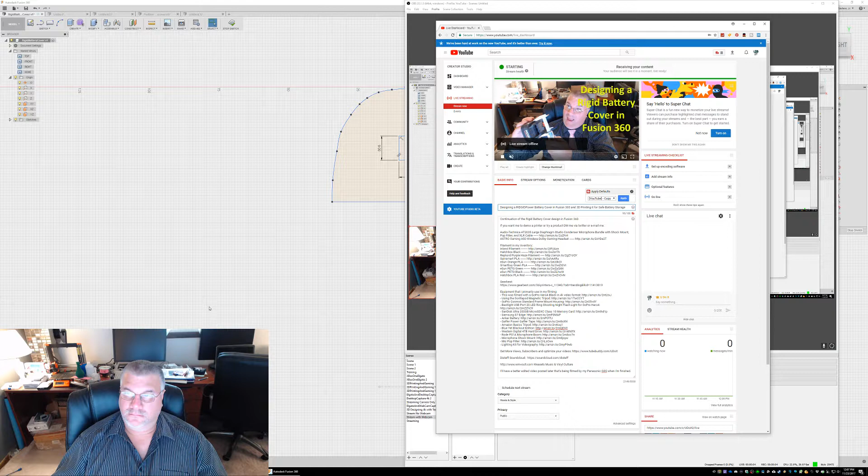This is designing a battery cover for the Ridgid battery that I have here. This is the Ridgid battery. We're continuing where we left off. This was the part that I designed and 3D printed that you can see on the screen right now. And I just want to continue the plate down the bottom. And if we have time before turkey is served, we'll do this.

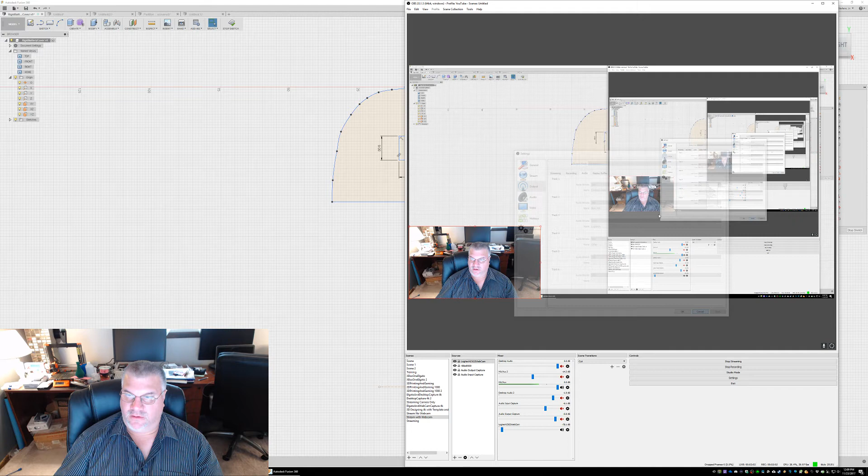So the last we left off, I was drawing a bunch of construction lines, and that ended up binding me, constraining me too much. So I'm going to do a 3-point rectangle to continue this bottom part that has to extend down to this point. And I already have that measurement, so I can do a dimension from here. Nope. Dimension here. Here. I just want to verify that measurement with my calipers. 68. Yeah, that's right.

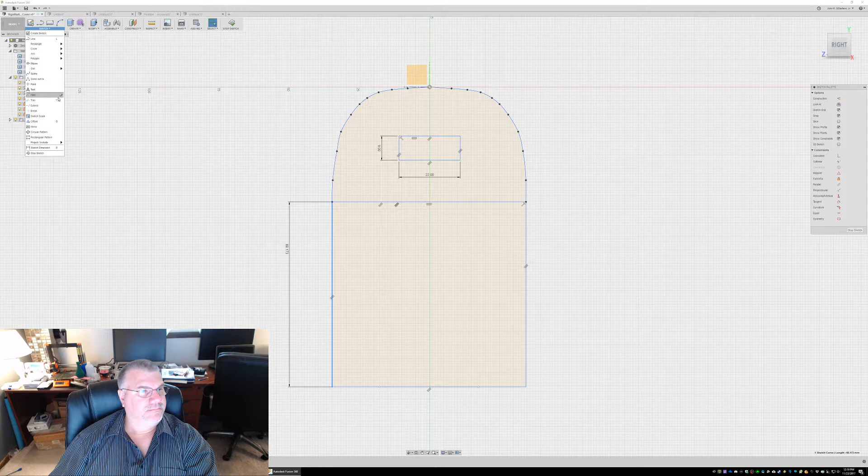So we'll do a 3-point rectangle, and 3 points because I want to span these 2 points and a point down here. And then I want to do a fillet down here. Do from here. 17 is fine.

Okay, so these two would be considered one unit right here. So that would be the entire plate that would go from this point all the way to the end here. Then I have to work on a portion that'll block this area here. So I need to take those measurements now. And I'll draw some construction lines. I have a measurement around 31 millimeters.

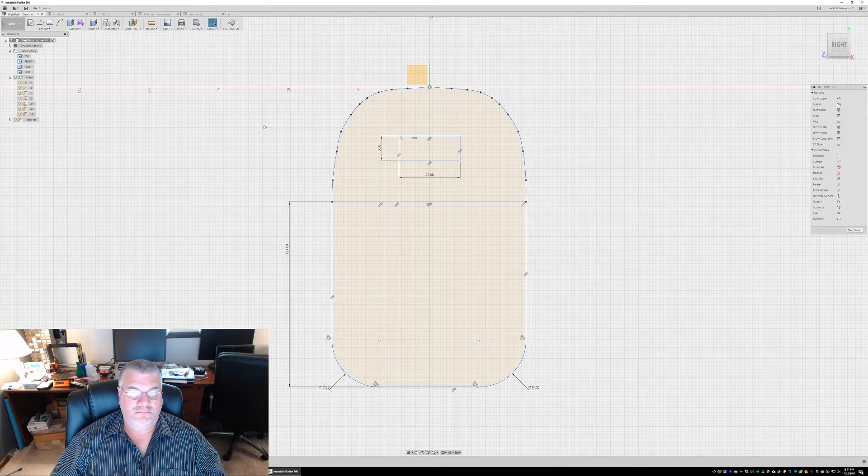So we can draw construction. And it's going to be from the center point. I want to measure the width. I don't need it to be exact. I'll make it a little bit smaller. So I got 43 millimeters for the inside. I want to do a center point. We'll just make this 43. So that's going to give us our extents, so we know where we're going to.

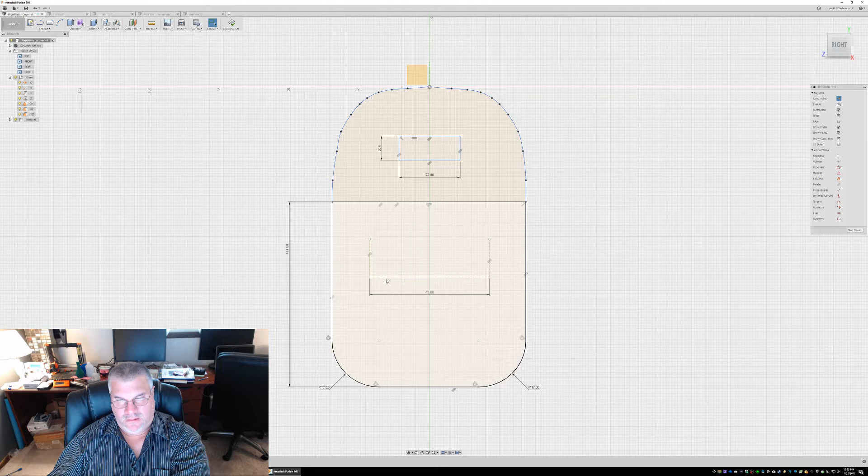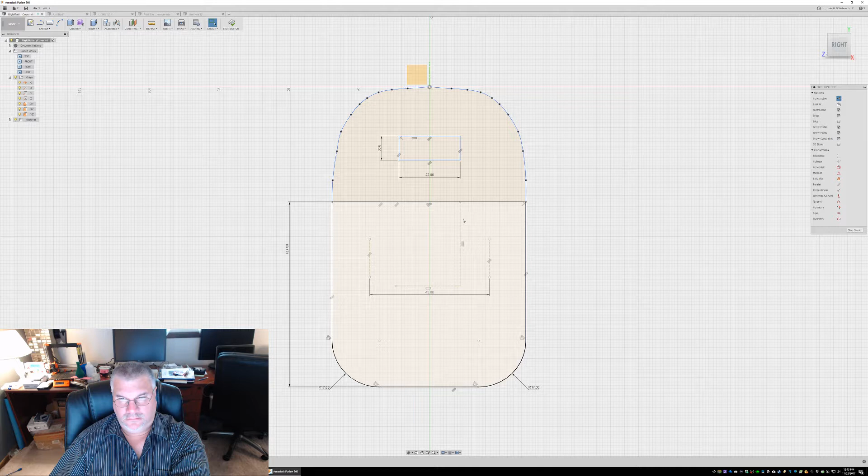That's how wide this opening needs to be. And I think we said 31. Yep. 31 measured downward. And now I'm just dragging these points up. Dragging the whole thing. Alright, so now I can do a 3-point rectangle. And this is not construction.

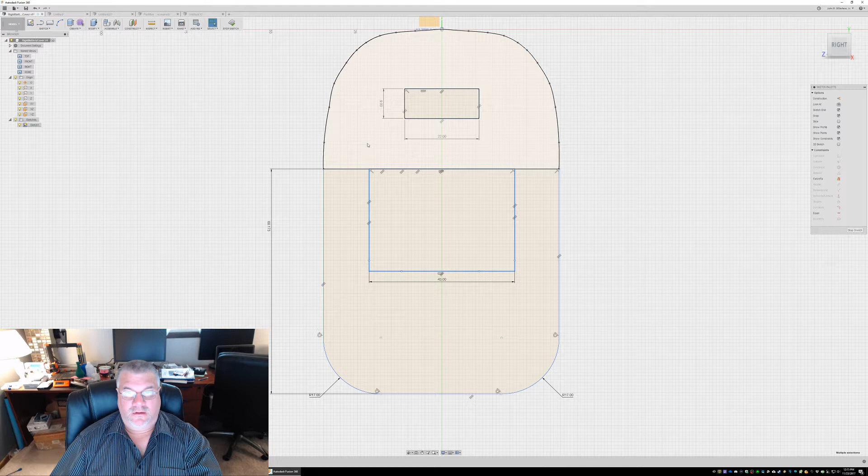Well, I'd like to see if I can hide this. I don't know if I can hide individual pieces and then unhide them. Alright, I'm not worried about it. I got my point. So this needs to be raised. No, that'll be extruded downward. And I don't want to go down all the way. Just trying to think how to do this so I'm not chewing up a lot of plastic. Guess it won't matter if I have the infill set low. So let me just measure this now. Okay, I got 11.86, so we'll just call it 11.

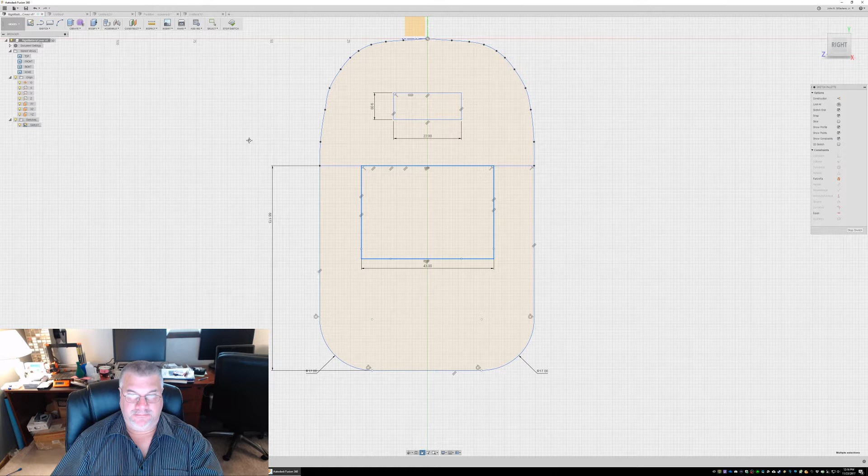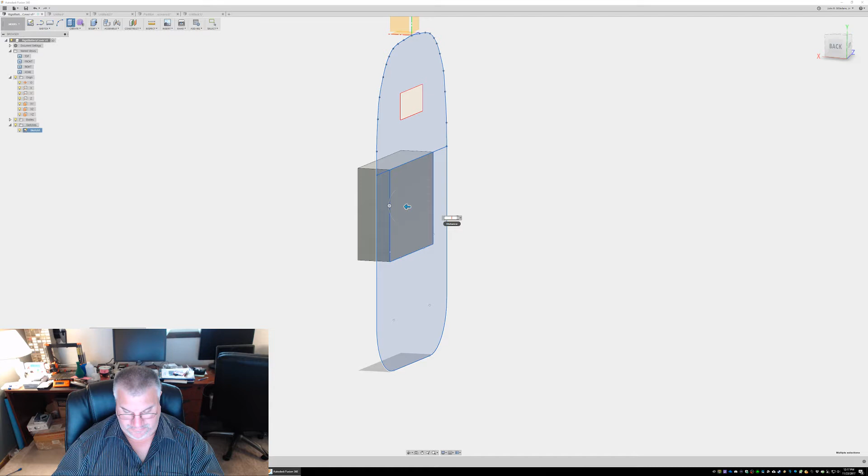That'll be extruded downward 11. Probably do that now. Extrude downward 11 millimeters. And then this entire thing needs to be extruded upward. And I think I measured this 2mm or 3. 2. And then this one edge.

So when I slap this into this here, push it down. That's the way it's going to be when I try to slide it on. Only the one really locks in. I can get it there eventually with some wiggling around. So what I need to do is I need to taper this end, thanks to, I think it was Bob. Happy Extruder said to taper this. Can we do a little chamfer maybe?

What's going on? That ain't right. So we want the edges, so we'll select this one and that one. Is that right? Nope.

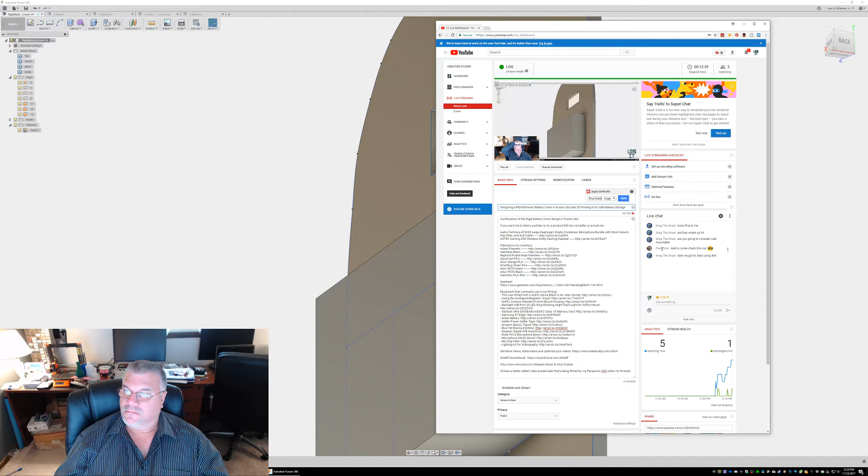So, are you going to consider wall mount? Oh, that's another idea. Wow. I didn't even consider that, Greg.

Let's see, can I pop this chat out? And then let's resize my window here. I'll resize it over to this half. Change my chat. Yes, that's way too big. That's what she said.

Yeah, so 360, yeah, if you're not using 360, it's definitely awesome. Definitely awesome.

So I need to figure out how to chamfer this, and that's...

Yeah, you can definitely use this technique to do it, although I don't necessarily recommend my technique because I'm still learning. But I got to tell you, from Bob's help and Happy Extruder's help, Bob Young, Papa Top on Twitter, they've been guiding me along the way and then sending me links to videos to watch.

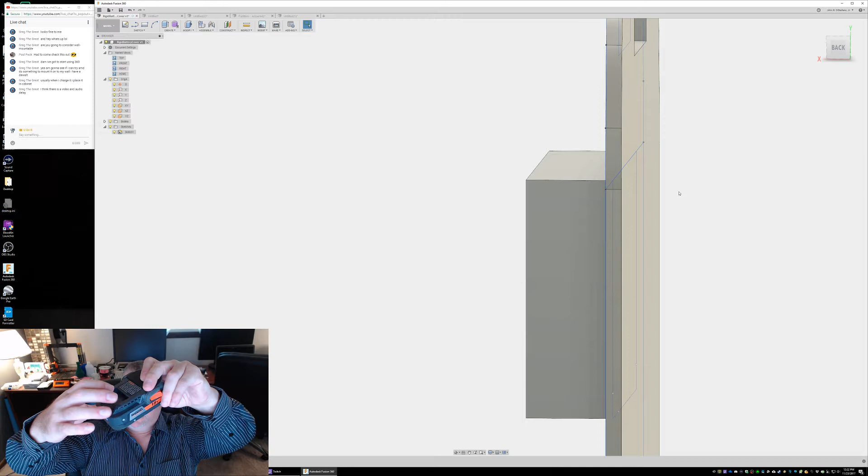All right, so this is only one part of what I need. This gives me the whole top part and the area that's going to protect the battery, which the terminals, I really don't need this part in here. I'm just doing it anyway just so I know, but I think it would give it some rigidity and would help my cause.

And that might even be a point for storing it on the wall, because then I have an area in this part here where I could drill into and mount a hook, or even design this out so I can have what are those notches called that you use for hanging pictures? Yeah, you know what, that might be.

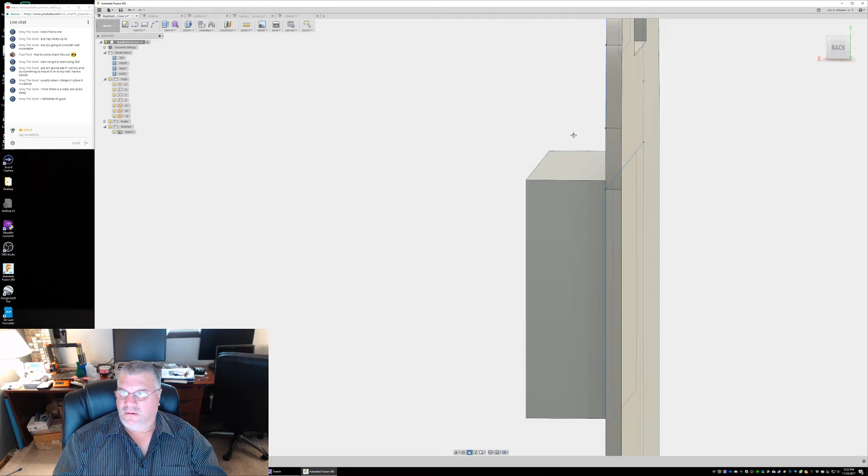Okay, you refreshed. All right, good. So I'm pumping out a lot of bits. I think I'm setting it to 25,000 kilobits per second. 25 megabits a second, I think is what I'm doing. So that's a lot of bits, but you can refresh to a lower video rate if you need to.

And the other thing I want to ask is, can you see all the controls? See, I'm on a 49-inch monitor. So my monitor is like, I see, this is my angle of view right now for my periphery. It's really awesome for working, but it would be bad if you're watching this on a smartphone, I think, which is a problem because I think most people are saying that they're watching on a smartphone.

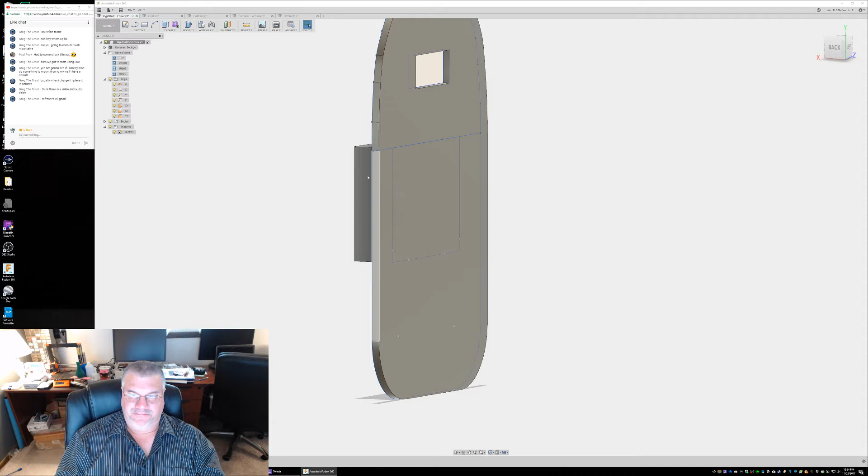All right, next part. So I think we can turn off bodies now. So we're back to the sketch. And then I need to work on the part that's going to extend downward around this and wrap around to...

Not that much plastic there to do that. I think I'll have it extend outward at this point here. I just need it to force fit under here. So this might not be that big of a deal.

I might be able to get this done in this time frame. I was concerned that I'd have to span this over several videos. The printing definitely will take a while because this is a large part.

All right, I'm just taking my measurements again. I'm measuring this depth here, and then we already know what the height is there. I think we said that was 11, but now I need this to be an accurate measurement because I need it to force fit.

So, all right, for those who have not used calipers before, just a quick rundown of some things that I learned. You want to, whenever you measure something, you want to try to measure 3 times. There's a method to that, and it has to do with uncertainty. I'm going to create another video on uncertainty, but the more times you measure, it kind of rules out these things that we're uncertain about, and it can do with what angle.

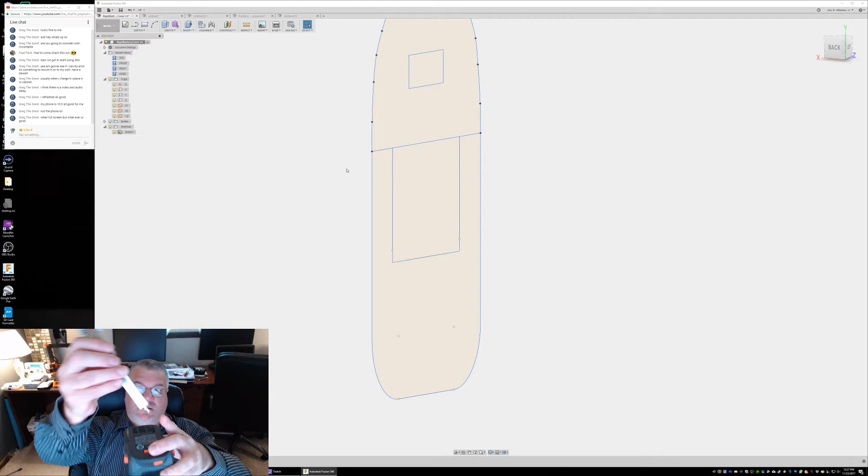The other concern is, yeah, I'm measuring this distance, so there's this little thing here you can use on the calipers to extend out to measure depth of something. But consider the variables that go into play when you're measuring. Am I holding this perfectly perpendicular? Because if I'm not, does that change the measurement a little bit?

Yeah, it would. So if you're getting down to the point of 0.01 millimeter, you could be off a little bit. That's why I'm rounding down to 12. I'm reading 12.07, you heard me earlier I read 12.08. So that gets into a little bit of that.

Got 12. That means I have to come down 12, and I want to make sure this measurement on the outside is good enough. I got a measurement of 76 on the outside.

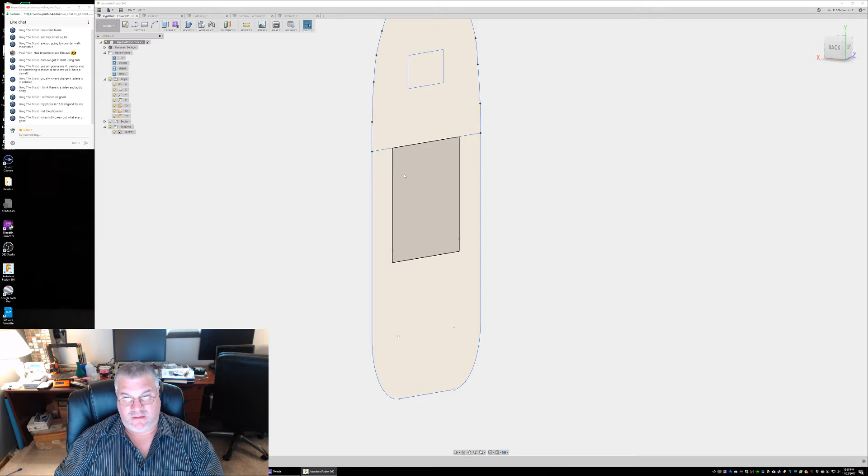So we should do some construction lines. Flip our viewport. Now we're looking down on the part, and I need 76 for the outside.

Let's see what my measurement is here. I'm hitting the D key to measure, but then I hit escape to reset what I'm doing.

Yeah, that's that distance, but that's not long enough. I'll do that. I need 76, so I'm going to use a center rectangle just to create some construction lines.

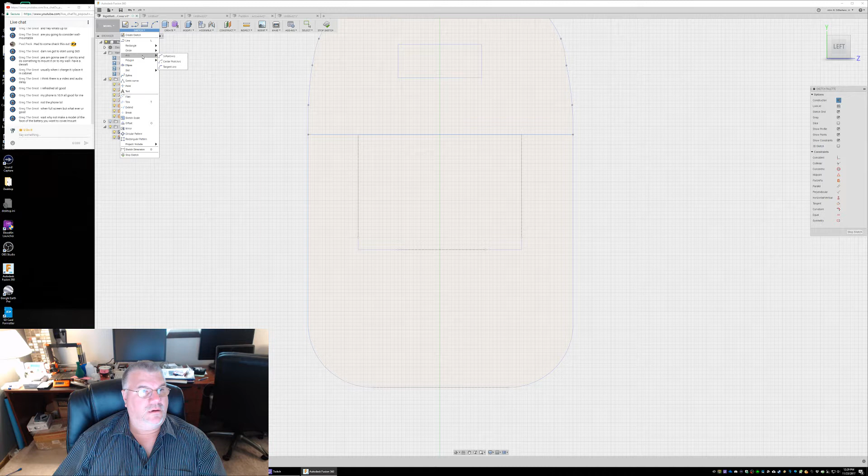Over here on the panel you can do all these constraints. I'm going to set up a construction line, so I click this little tab on the sketch palette on the upper right. And then I'm going to draw a rectangle, and I'll make this 38, well really 76.

Rectangle, center point. That's from my axis. That's good, that gives me the extents.

I can delete these points. See, my last time working on this, I made some big mistakes with having all these different construction lines all over the place, and then I ended up getting over-constrained.

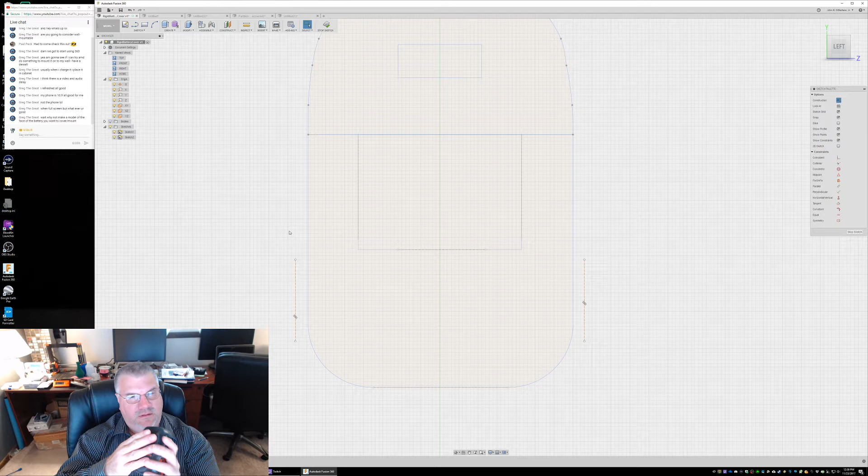So this is the face, that's what I got. Or maybe I'm not understanding. So the face is all this part right here, right?

And then the part I'm working on now is making it so that it actually... really what I'm modeling is this. That's what I'm modeling, but in such a way that it will lock into place. Right? That's all I'm doing.

And you can see I could actually take measurements from this. Not a bad idea, but I'm trying to do it the other way, just by inspecting the part. Almost like a challenge.

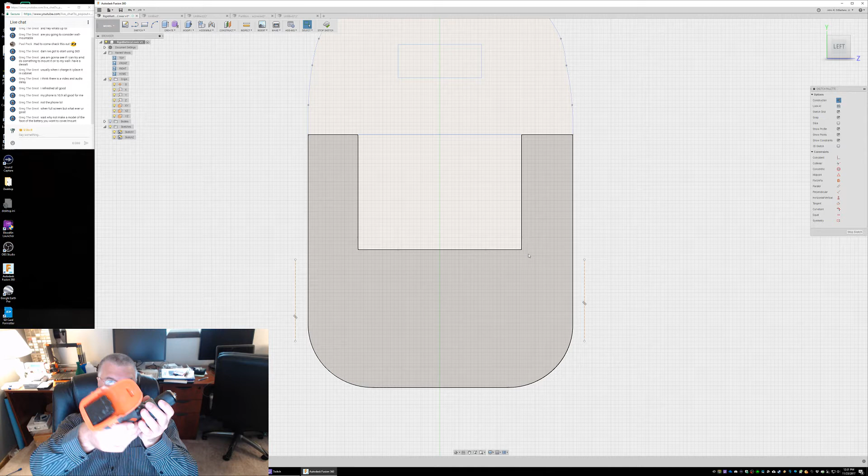And that's just what I'm doing right there.

I'm sure the longer you watch a stream, the more of a delay there will be between what you're typing and what I'm responding to.

All right, so this becomes another point. I'll come from now, I don't need to go the whole way. I'm going to measure downward from here.

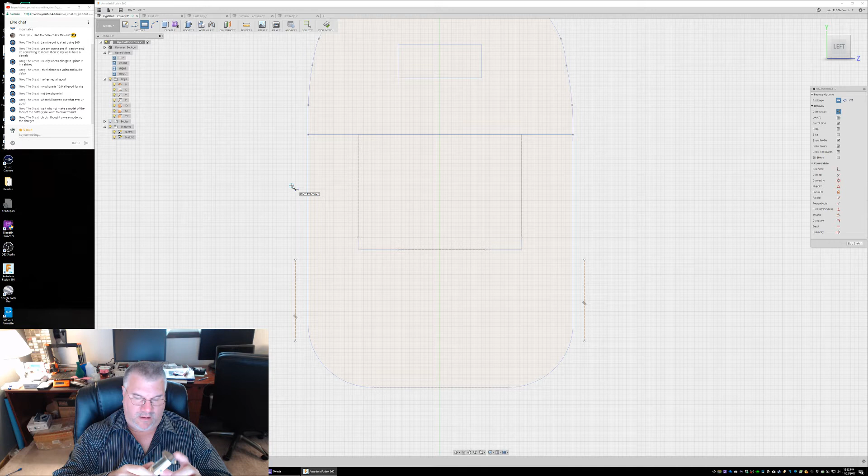And by the way, when you do this measurement, always take your caliper back to the beginning and zero out. Even when you take three measurements, do that every time.

I'm measuring down 23 millimeters, down to this point where I really need to start this bottom part.

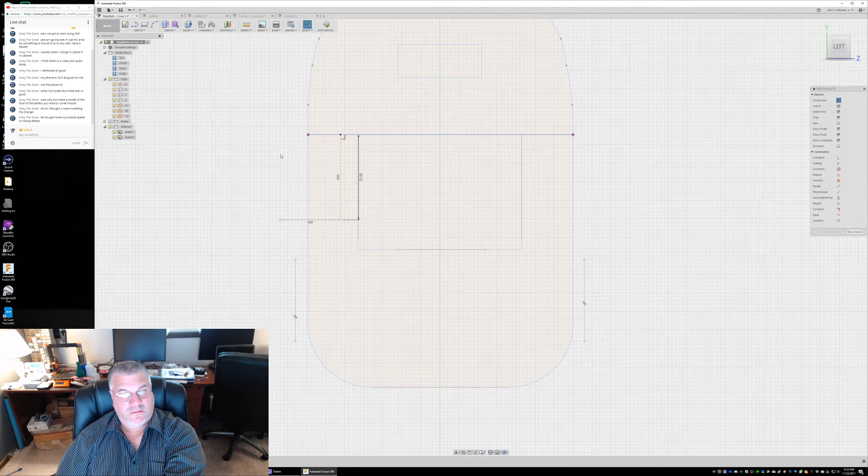Now I need just a rectangle to go down 23, and I can delete these extra pieces.

Should just drag this up, and then it's going to come down all the way to the bottom. Here, it'll come down to this point.

I like that this keeps moving. I want to move that point. Then you have to hit enter to lock it in.

And it's easier to move it this way than dragging the cursor, because then you have a chance of what you witness, my cursor moving around vertically when I'm moving a line horizontally, and that changes the position. Then just hit enter to lock it in, so that was a right click and move.

Now I can do a rectangle all the way down to the bottom here. I can get this point.

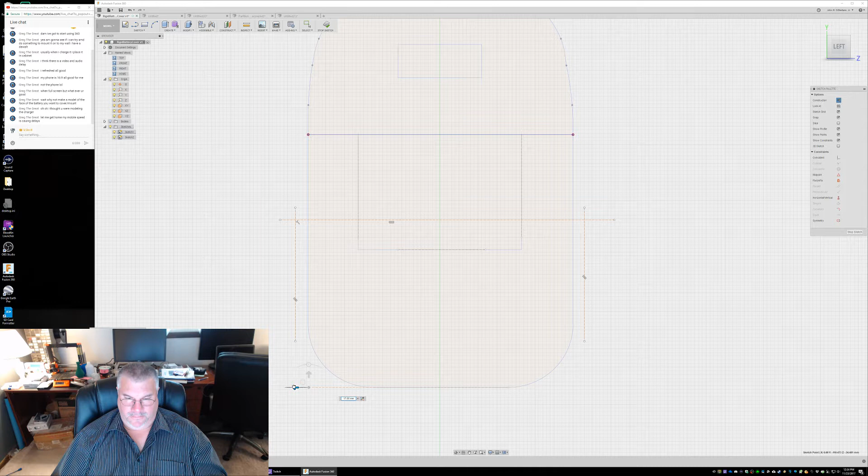I can get this point, move. This is just the extents.

So what's up with that? I don't want to drag the free move, I want to drag the arrow. That way if I drag the free move, I can move around anywhere. I can even rotate, I don't want to do that. That's just the point anyway, it doesn't matter. But if I drag this, it'll free move. If I drag it this way, it'll move along one axis. That way we're locked in.

So now I can draw a rectangle at that point. So just here at this intersection, down to here, and you notice it just automatically snaps to that intersection. And it's not construction.

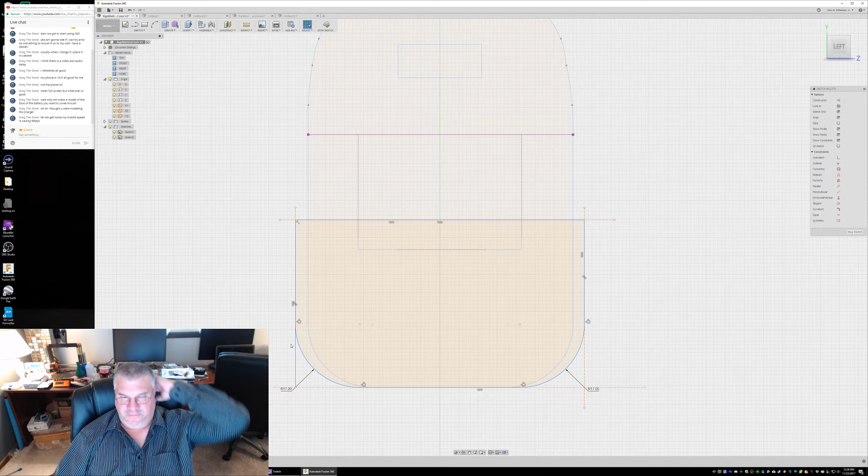So that's the full extent, and then I want to round off these guys. And that's 17. I don't know why when I enter a value for a fillet on one side, it doesn't repeat that same measurement that I just entered at the other side.

Alright, so this is what we want to extrude downward. And this is going to extrude upward also. So we'll go upward, by 2 millimeter.

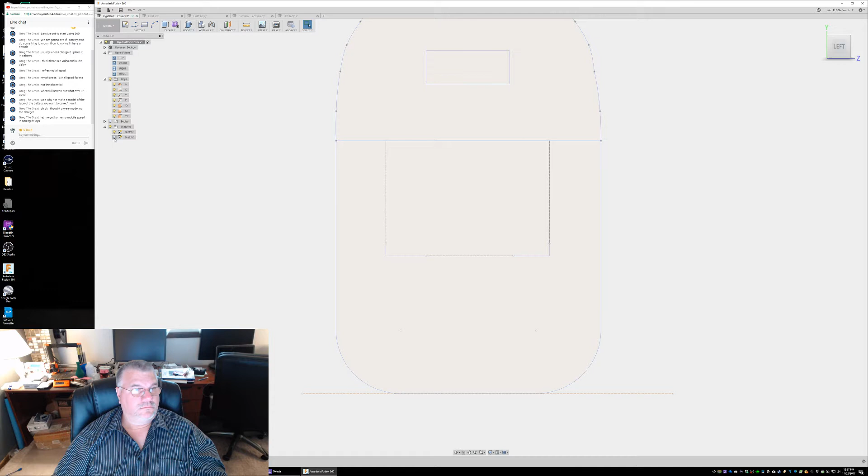And then we're going to go, yeah. Okay, so we don't want to turn the body off. On, select.

Where do I want? So now I want to measure. That gave me the total plate area. I don't want to extend downward yet. I have to draw in areas that...

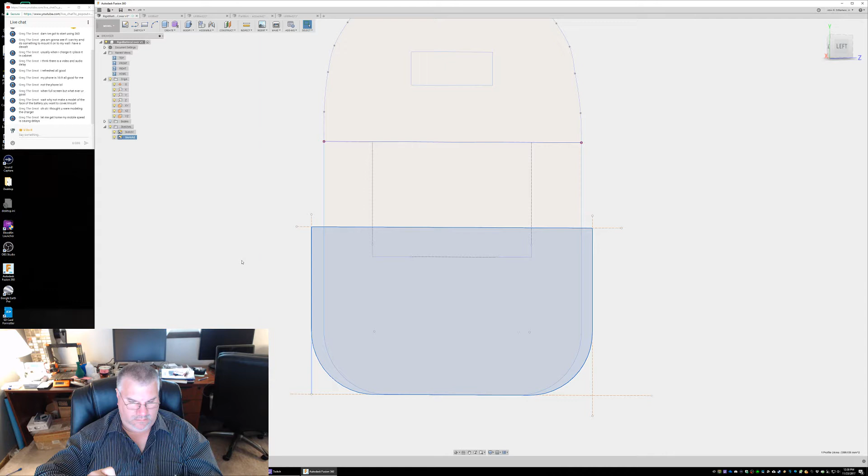I have a measurement of 66 millimeters. So 66 millimeters is about for this area here, this distance. Thinking I need it to be just a little bit bigger. So I'll go with 67 millimeter, 66 and a half maybe. Because it looks like 67 was a little bit too much play.

Sideways. You get a 66 and a half. Tiny amount of play.

So it's really going to lock in with these clips. I'm not too worried about play down here. I'm not putting this battery cover in here in such a way that I expect it to lock in. It's going to be difficult to remove. I just want to get it locked in to protect from these terminals shorting out. That's all.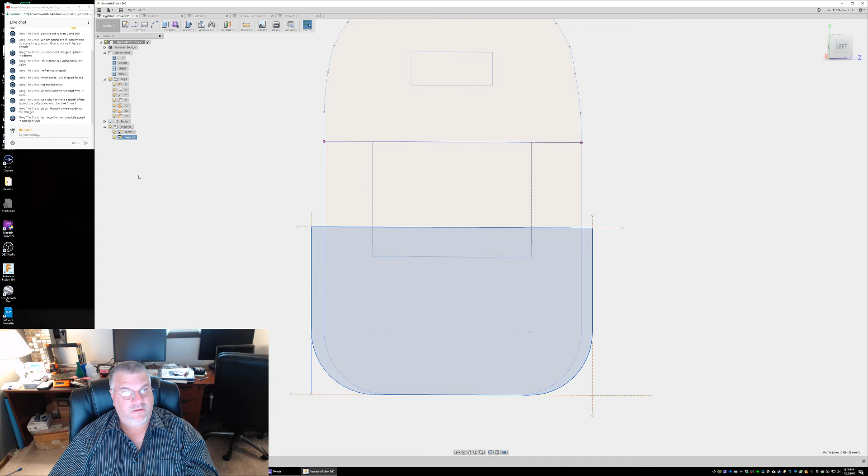So now we need a measurement of 66. Let's see how far we are. I want to go to sketch mode. Nope.

Stat. I just want to measure from 1 point, which apparently I can't do. Here. 69.

Now I need a reference for 66. Center point. This is all I'm worried about right now. And the distance, which will go bottom.

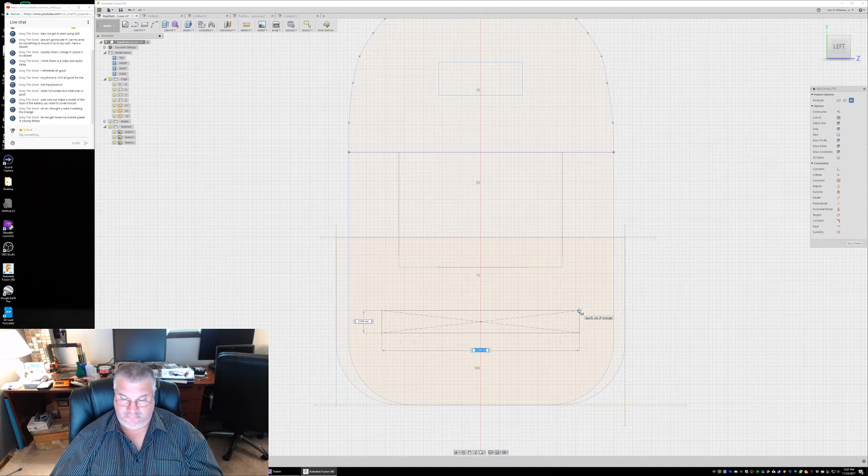I'm just eyeing it up. 53. Make that... I want to move that so that it is at this point.

I'll make that construction with plans to delete it all.

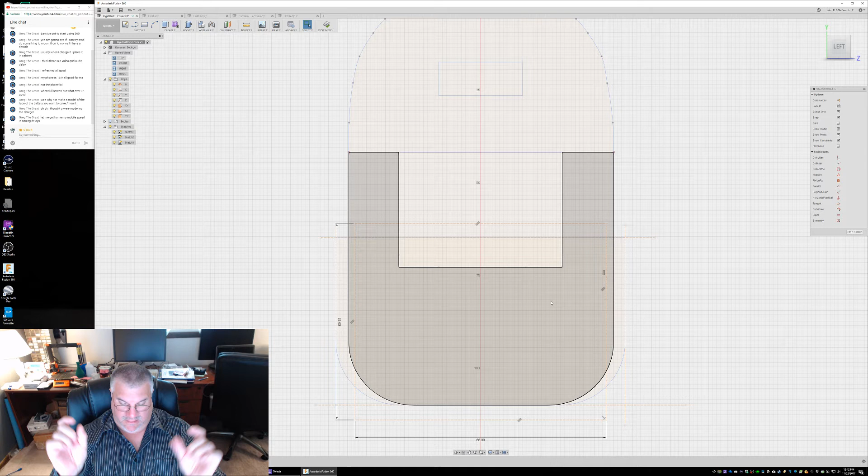What does this give me? This gives me the outer part that's going to extend downward a small amount.

And bottom. 10 millimeters.

Whole thing needs to move. And I want to move point to point.

Now after deleting all those lines, I don't know if that's the center.

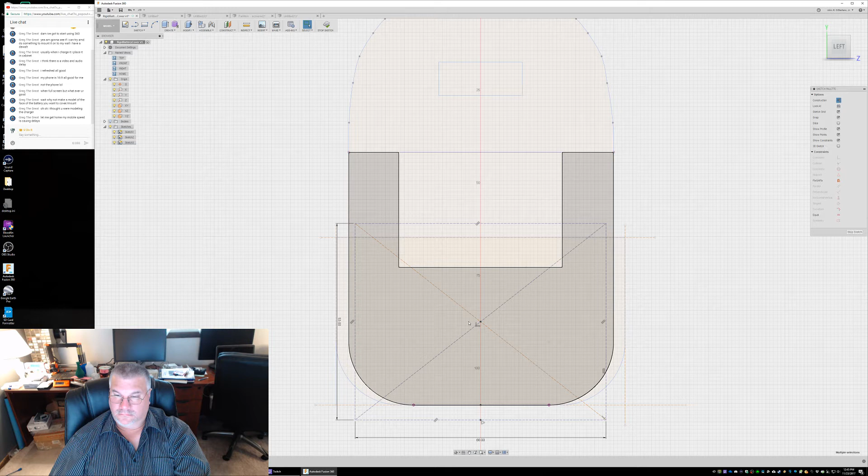I think I can select this entire... I gotta do it individually. And I can move it.

I want to specify my pivot point. Be here. I can turn that point off. No, I don't need the pivot point. I'm just going to go from here to this point to this point. So I move the entire thing.

So by adding a point on each of those lines, the center point, using the midpoint snap, I was then able to use the move to move from point to point. And it literally just moved it up in line with the bottom line. That's exactly what I wanted.

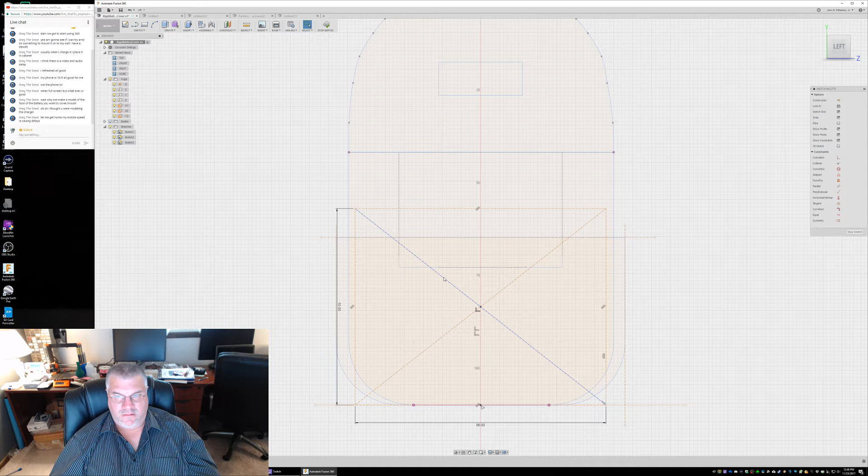Now I need to delete all of this. I just want to try to delete the construction lines because it creates a lot of noise in the drawing, and you start to lose sight of what you're trying to accomplish.

So that was 66. That was this point here. This maximum point at around this entire thing, because this is actually curved. So I just kept sliding the calipers along until I found an area that looks like it was going to work.

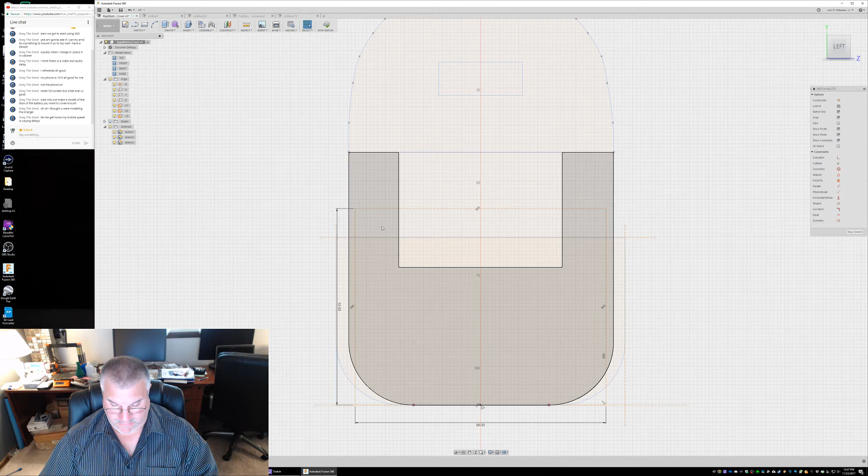All right, what's the next step? So from this point to this point, we can go downward. So we'll extrude that downward. And then there's going to be another point, 0 out.

See, now I push the calipers all the way. As far as I'm concerned, they're touching, and it's reading 0.01. I squeeze them together a little bit harder. I always like to pull them together and hit 0 just in case. And that's one of the things that gets in the way of uncertainty, because without going through the process of physically pulling them together like this and zeroing it, I could have just added a 0.01 error to my measurements.

Now what I need to do is get inside here. I got to measure them at about 5 point. This is what I want to be a little snug. And there is a resolution factor on my printer, so anything that's like odd is usually not going to work out. Because the layers are done at 0.2, I think, millimeter.

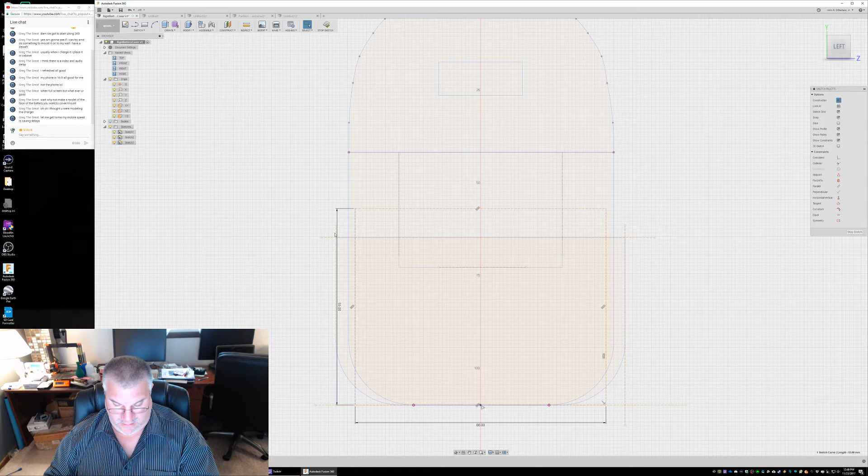I'm getting a measurement of about 5.9. I got a feeling if I make it 6, it's going to be way too tight, and I want to be able to get the part on. I'm wondering if I just make it 5.8 and be happy with that. Because again, I just want it to lock in, and that 0.2 millimeter difference is only going to create a little bit of wiggle room, but I don't think it's going to be enough to cause this to snap off, because these things, in combination with these ridges, are what's going to keep it locked in from moving this way. These things here are going to keep it from sliding off. So the combination of the two of them, they're going to lock it into place.

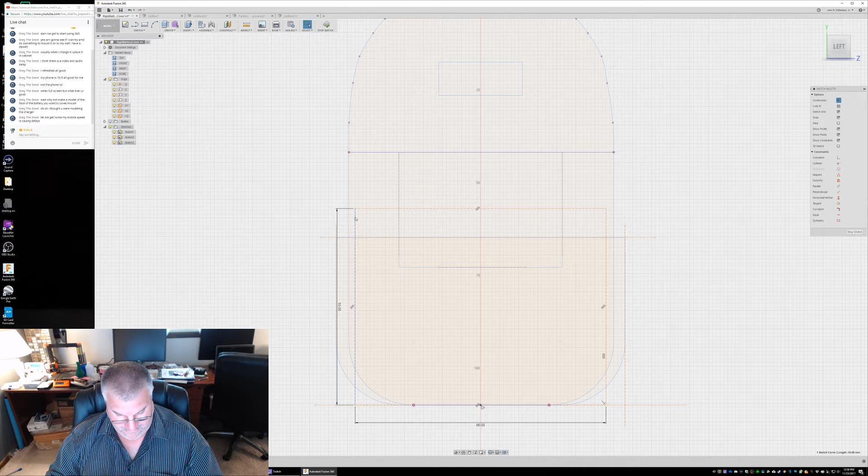Let me take my measurement again. I'm saying 5.7 there. I'll say 5.8 for that depth. But then there's this area that I can only go down so far. I got 2.8. .6. Yeah, I got 2.6.

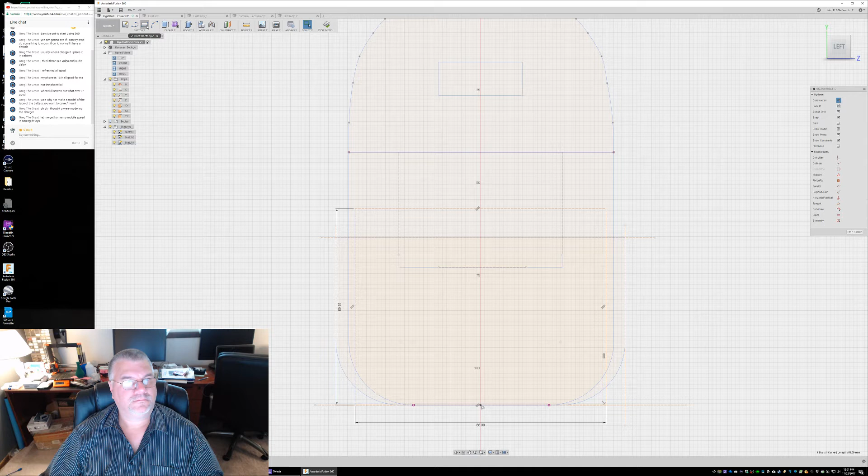So now I need to draw another rectangle, 2.6. Where to where? From this top point. How far down? Not construction, that's good. And we'll do the same thing the other way. Let's see what this distance is. I think that 36. Nope. Crap. I'll do that 2.6 by 36.

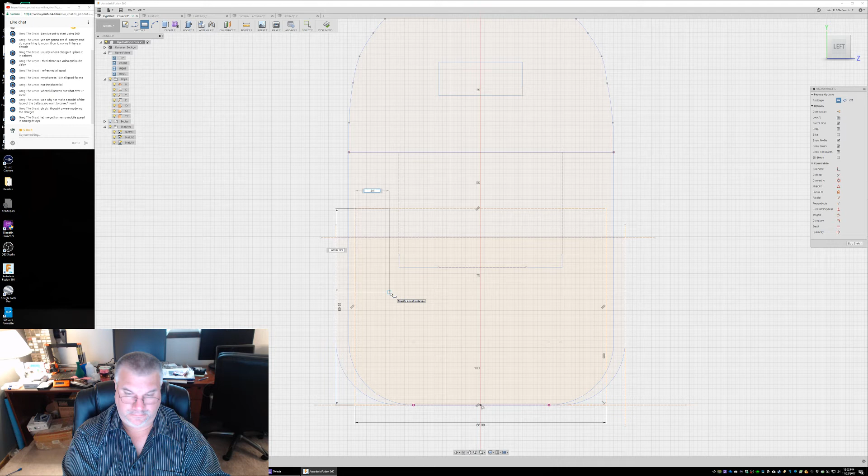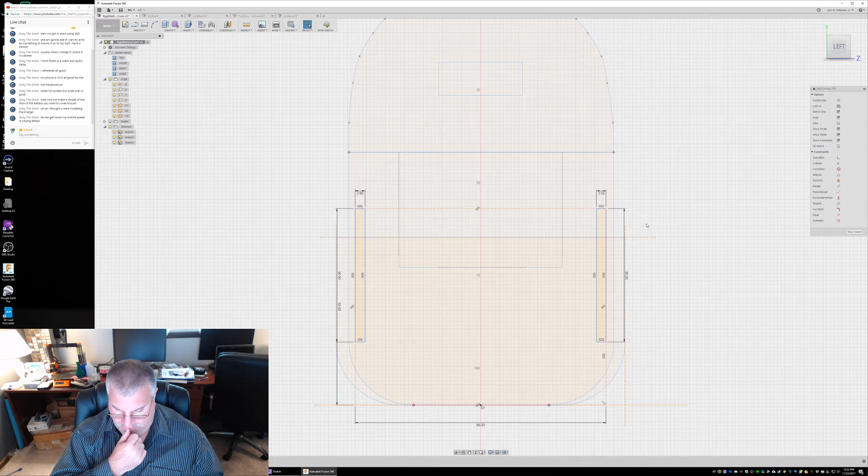And then I'll do the same thing this way. And what that represents is the area that we will extrude downward at a certain point, which has to be on another plane. Yeah, that'll be on another plane because that's going to extrude upward. I think the way I might do that is extrude downward this entire depth. And then I will subtract out by extruding it downward again, a smaller amount.

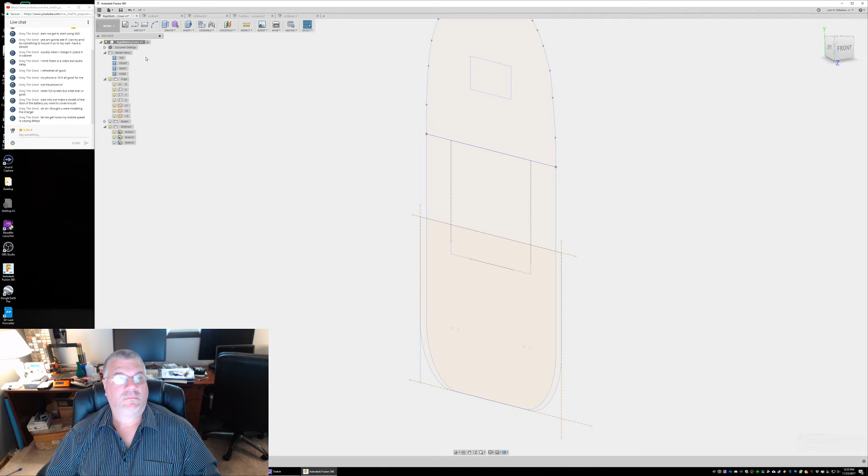So now I'm going to check this depth again. I got 11.7. We'll call it 11.8 maybe. We can extrude that. See what the body looks like. The wrong way.

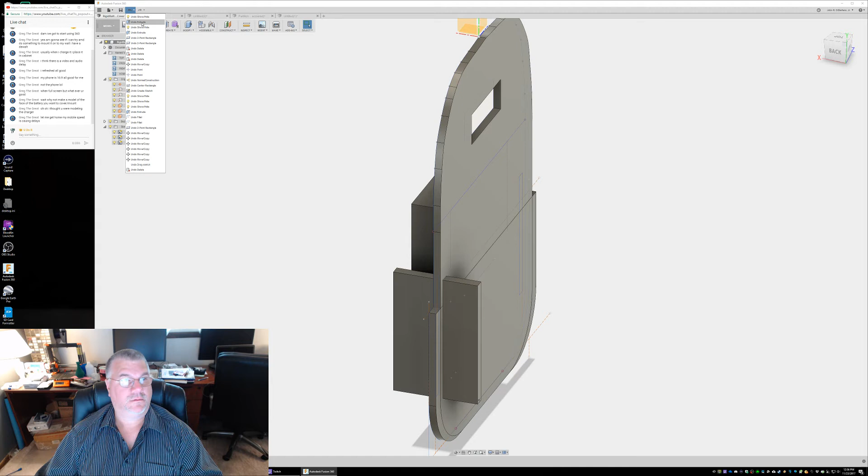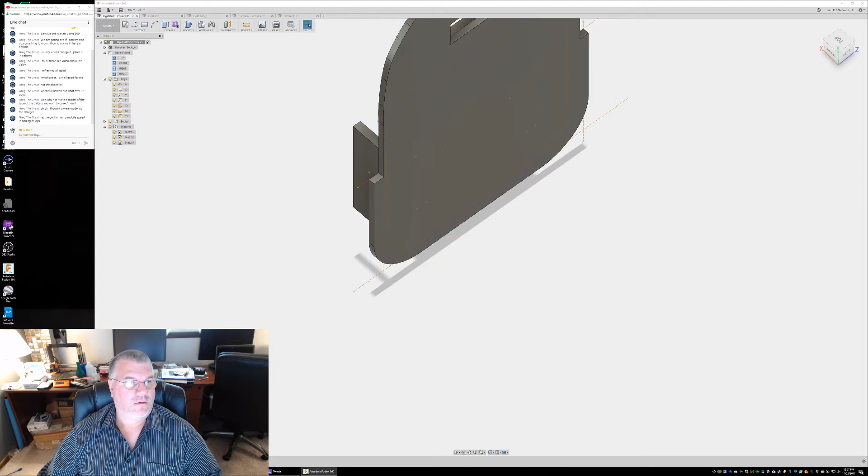Oh. Undo. Extrude. Undo, extrude again. .8. We turn the sketch back on. And this distance. I got 6.2. So now I'm going to extend downward. 6.2. Cut away from what I just extruded.

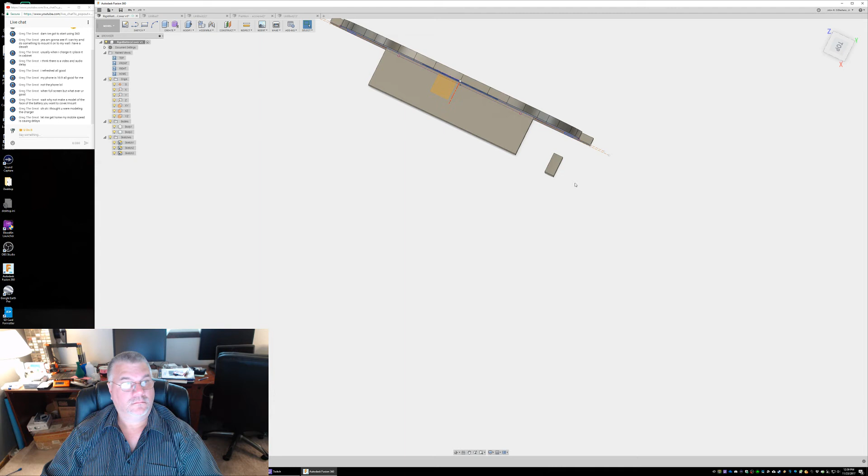Point 2. So now that's not connected to anything yet. It will be when I extrude down these other pieces. So that's the piece that's going to lock in. That's the piece right there. That little piece right there that's going to lock into that. And I'll repeat the same thing over here. 11.8.

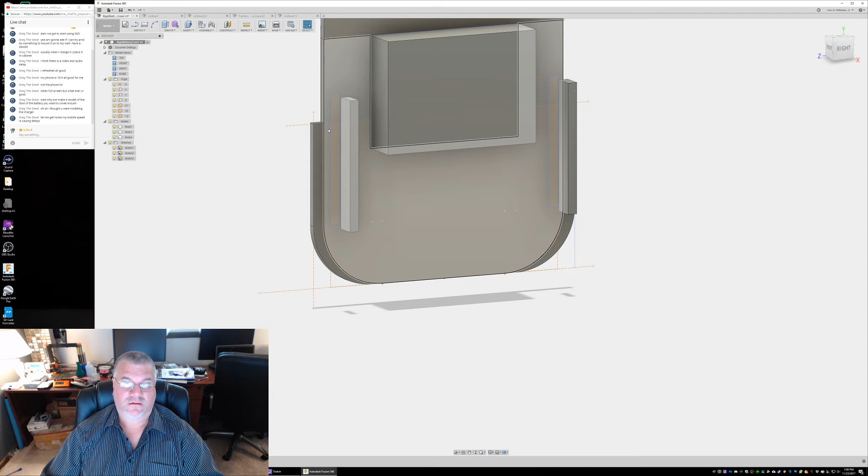So I just right clicked and chose repeat extrude. And then I said that was 6.2, I think. There are the two pieces there. And that's going to be joined by, I think we're almost done. It's going to be joined by extruding down this piece around this. So I have to draw some connecting sketches. I don't think it's going to be that big of a deal. Turn the body off. Connect.

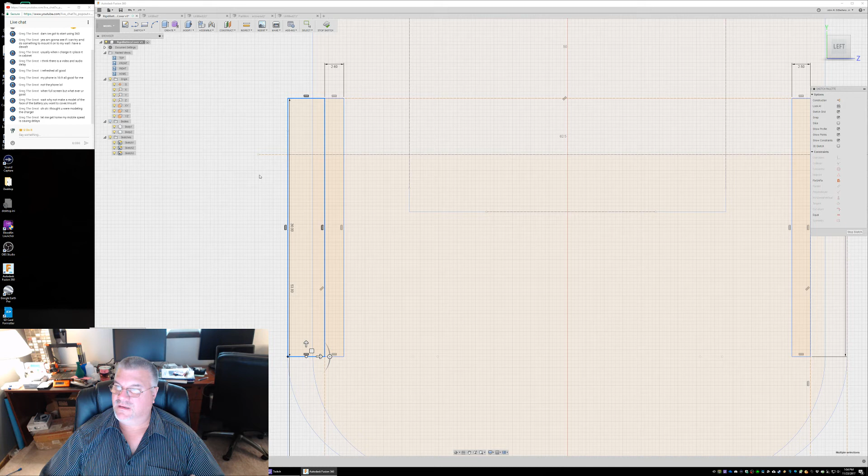Created different sketches each time I was doing something. What I want is the ability to select which sketch I'm working in. Might be it. There we go. Yeah, see, I just pasted a new one there. That really didn't help.

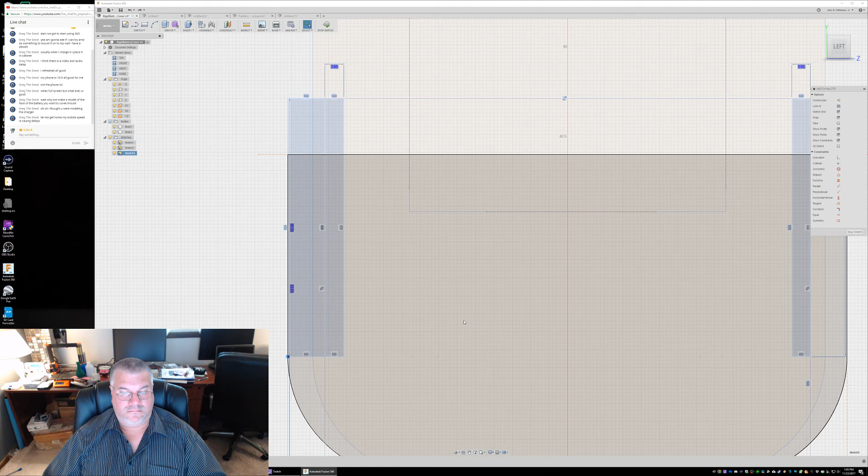Edit sketch. Yeah, my references aren't even in here. I wonder if I just continue drawing this. What are you doing?

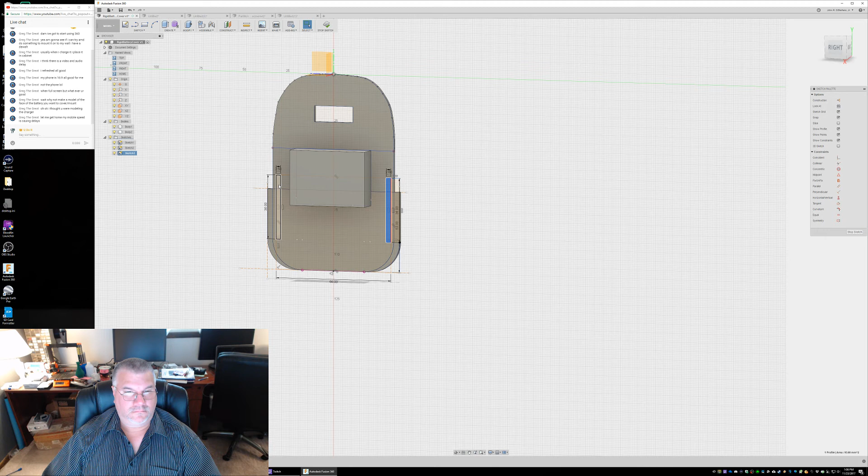This piece I want to. Dude, I extruded that down. And I lost my buffer. No. Alright, we'll extrude 11.8.

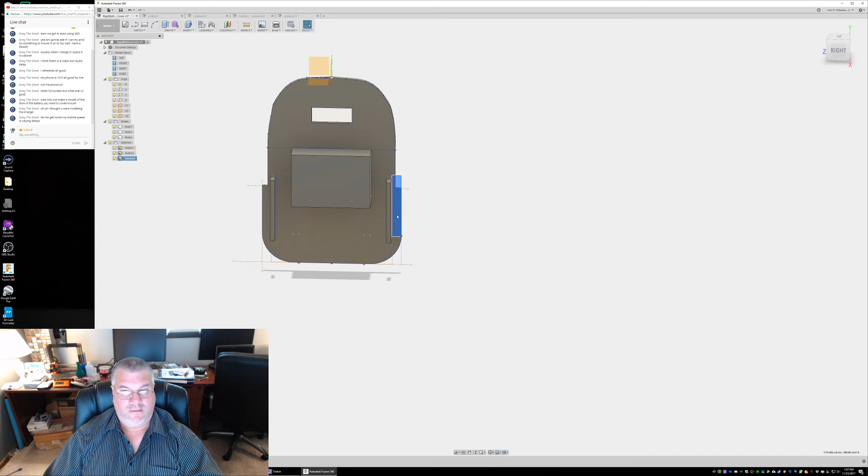Oh, they're already there. Okay. I don't know what just happened. Thought I lost him. Alright, this guy. I want to extrude down 11.8.

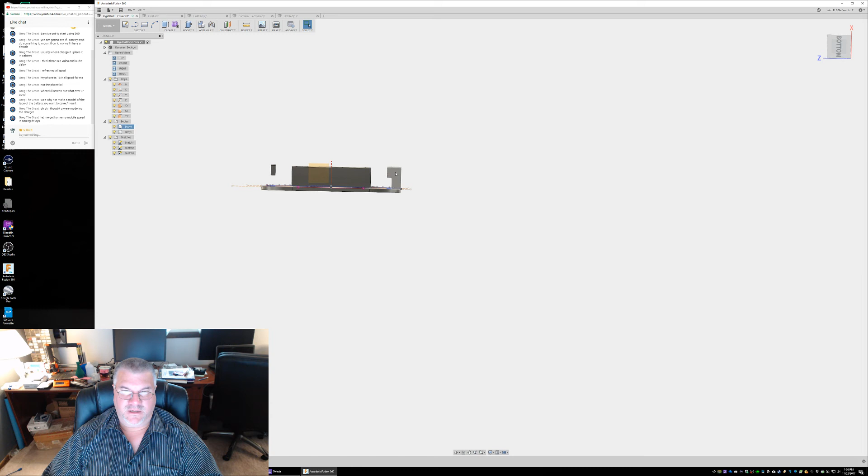That's what's going to lock in, right? That's the part that locks in right there. It's one solid piece that'll get printed. And I'll print it this way, face down, and the only place we'll need supports is right there. So that'll be pretty efficient for printing.

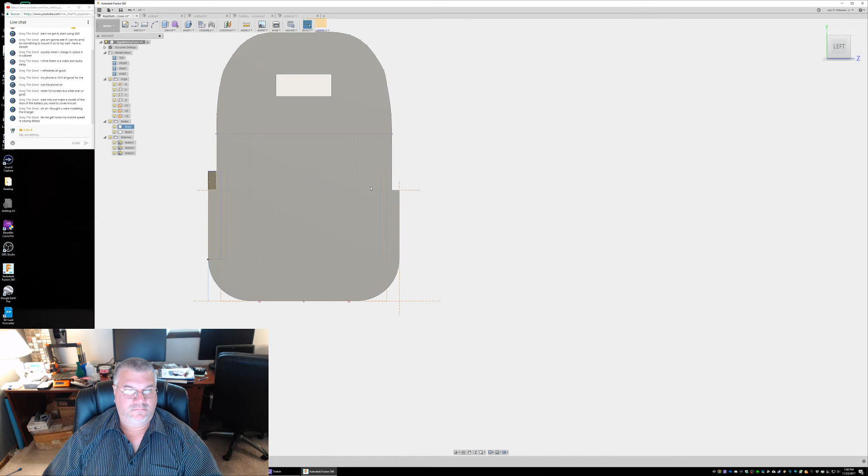Alright, so we'll repeat that same sketch part on the other side. And it doesn't look clean, but I'm going to give this a print as soon as I finish this rectangle on the other side. Back. Wrong sketch.

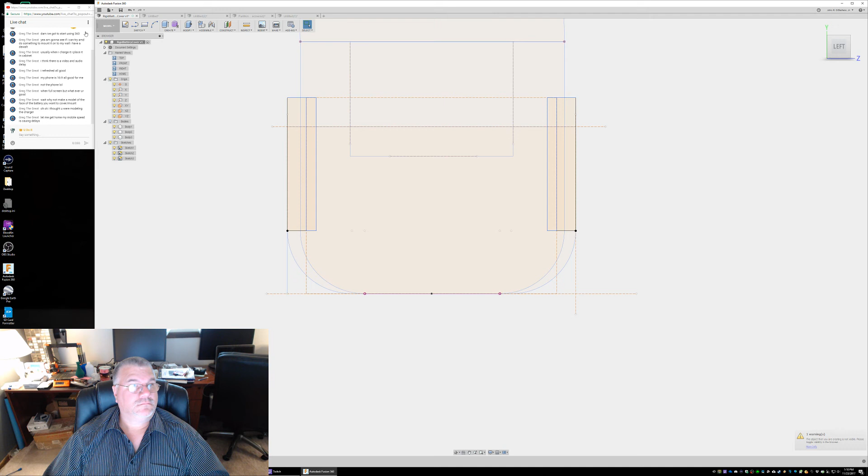And that part, we're going to extend downward again, just like I did the other side, down 11.8 millimeters. Not you. Here we go. We're done for now. Prototype number 2. I really want to chamfer this, but I'm going to live with it. And I want to see if this will work. This will probably take a couple hours to print.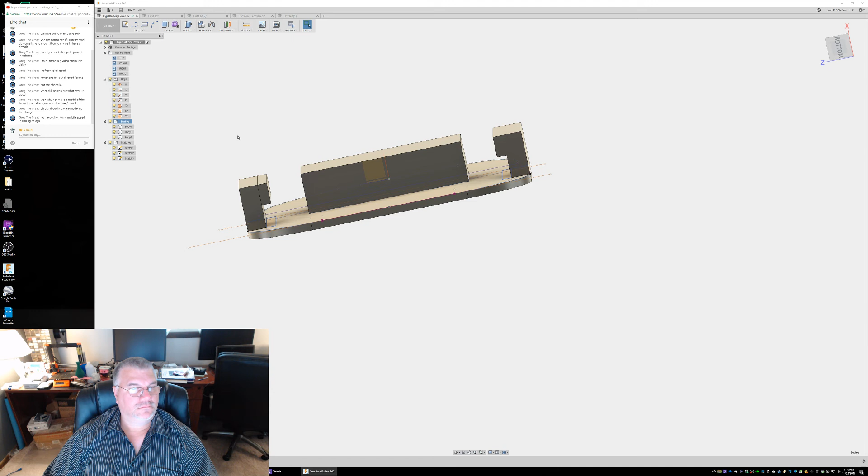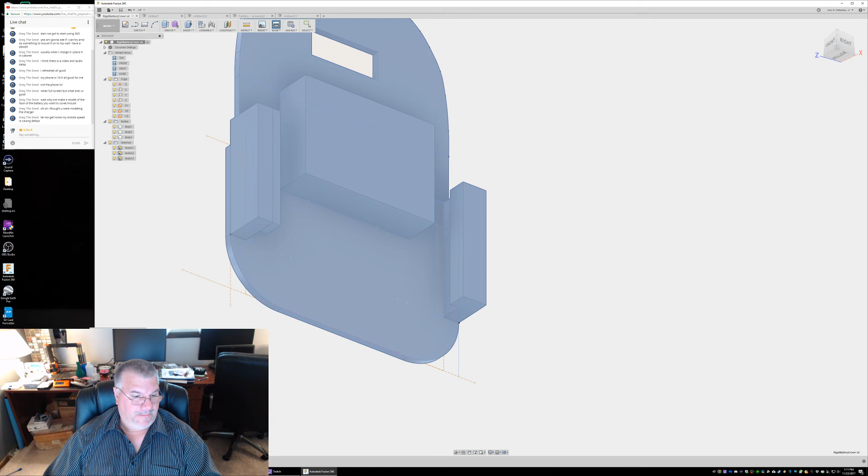What is this? And I'm going to choose 3D print from the file menu. And I'm going to save it to an STL. Everything. Crap, did I lose my... I lost my slicer. So, slicers, projects, 3D printing, newest one.

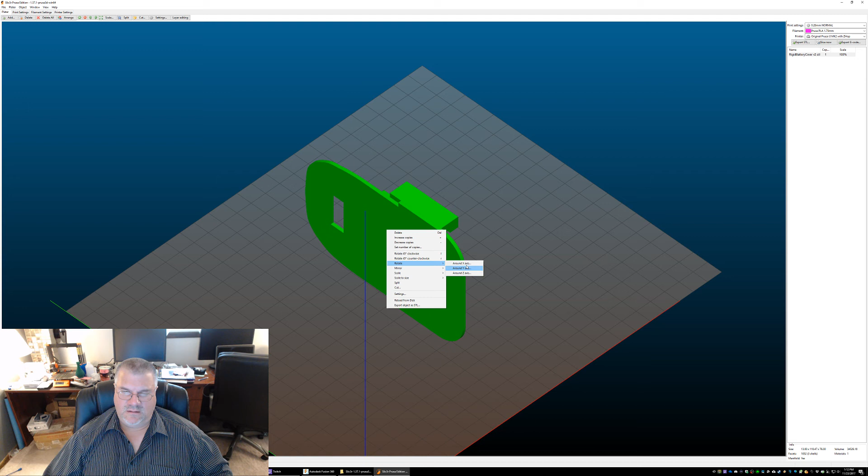Now I'm going to add this part that I created. Rotate on the axis. Nope, y-axis. And then I hit the arrange button. I want to go for an infill of 10%. Slice it. Oh, you know what? We need supports.

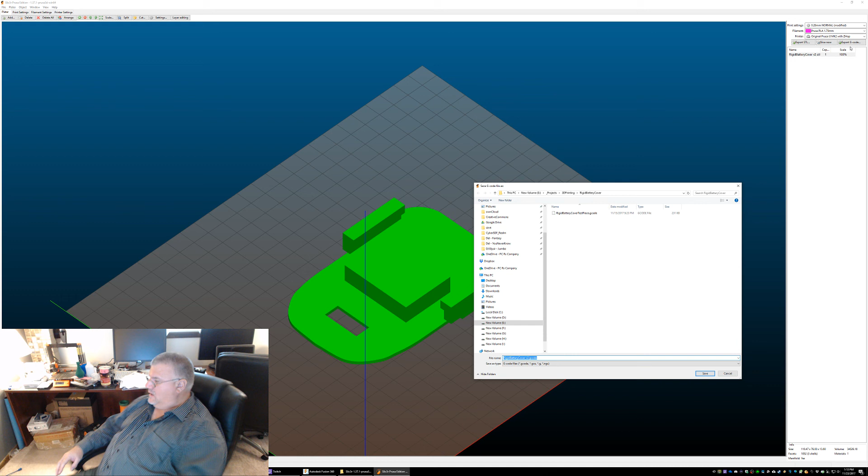All right, I'm going to slice it, and we'll export this. You know, I got to connect up my Octoprint.

Yeah, I'm just raising the Z-axis away from the bed because I'm preheating it. If you preheat it with the axis down low, the thermistor will be in an area where it's not linear in what its temperature is. Made sure the print bed was clean. Alright. Then we'll start up Octoprint.

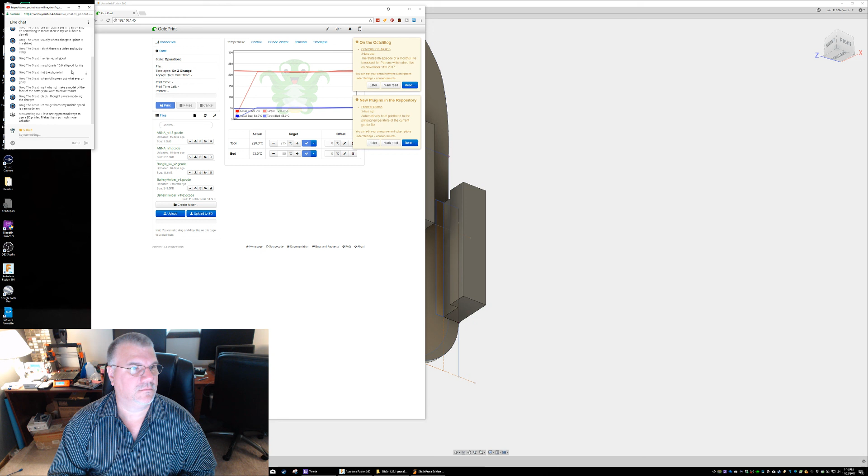Don't know what time you joined, how far along you saw, but this is just a crude way to create a battery cover for the Ridgid battery. And then Greg the Great had a point, maybe I could use this to hang it on the wall, so this extra little bit of beef here will give me an area to create a notch like you would on a picture frame or a clock keyhole notch, I think they call it.

I got the keyhole router bit. I wouldn't do it that way. I would actually do it by keyholing in the model here and printing. But I'm about to print it now.

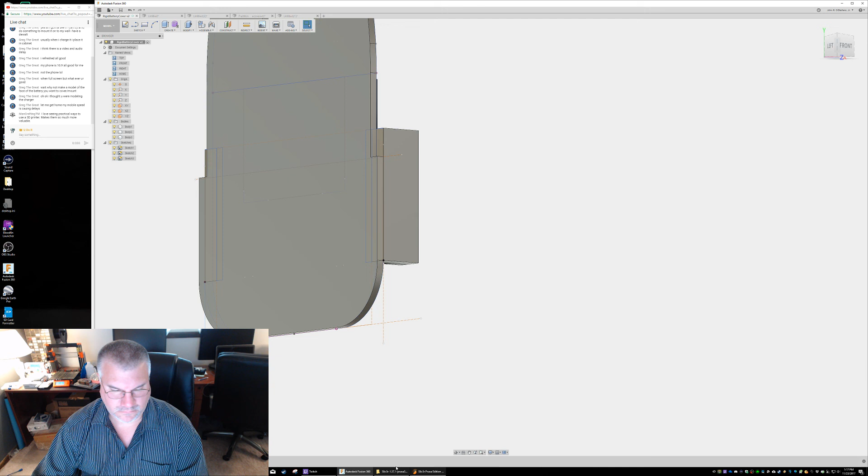I'm in video editing. Project, 3D printing, Ridgid battery. Later. Oops. I uploaded the wrong one. This might take an hour. Might not be that bad at all. 2 hours. Alright, so it's probably 2.5 hours because it's not that accurate as far as an exact time it will take. Yeah, looks like it's going to work, so I'm going to hit print.

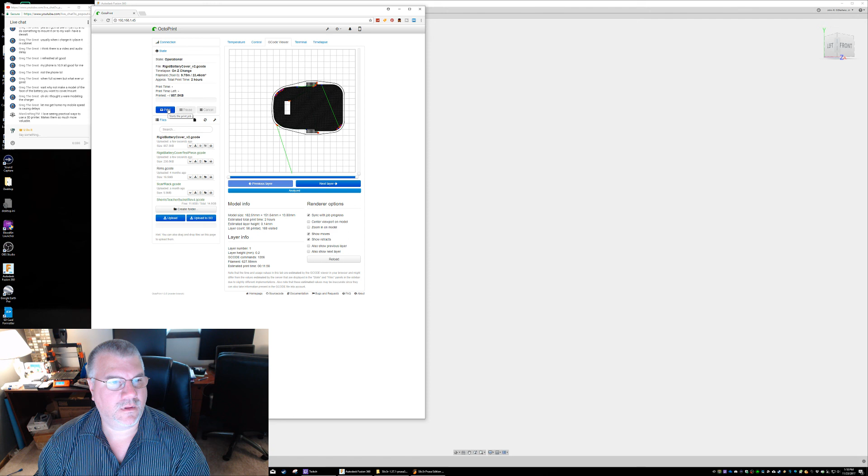So what we'll do is I'll do a review video of this. I don't know if it'll be tonight. I might do some gaming tonight. I also have to work on an app, iPad app.